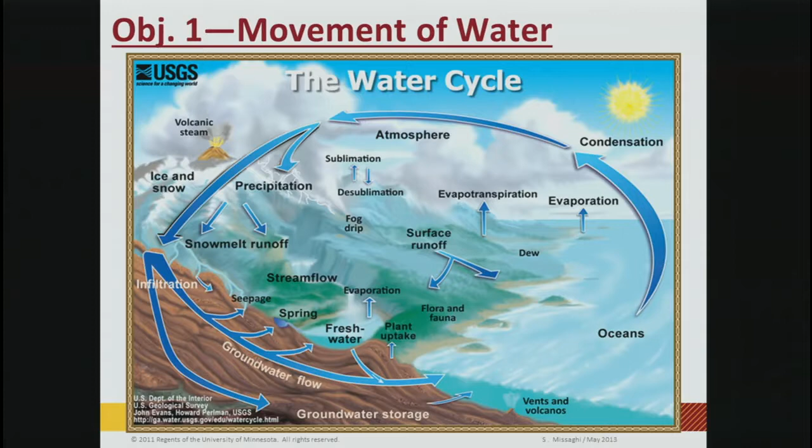Water cycle, right. I was even going to help, but I remember this doesn't show there. But it says it's a water cycle, right? It's a good reminder again. It's a constant move, constantly moving, going from the ocean up to the sky, down, and so forth.

But it's not as simple as it is. It's got many parts, many different things happening. Unfortunately, fortunately, we're just going to be focusing on this little bit tonight. We're just going to be talking about surface runoff. We're interested to see what happens when the rains come, hit the ground, and how does it move downstream. That's what we're interested in.

And then objective 2 was how water moves. We're interested in how water moves on the surface, but in reality, water is everywhere. We have groundwater, we have surface water, and in groundwater, water moves somewhat similar to the surface water, but we have aquifers and so forth.

Did you all cover this all up? You know all these things we talked about last time? Good, I don't see anybody shaking their heads.

No, okay, and then the idea that water shapes the land. And that is true. Not only shapes it physically, it charts the streams and the lakes and everything, but also, depending on where the water is, most of the cities are built around the water. So it also has an impact on the social.

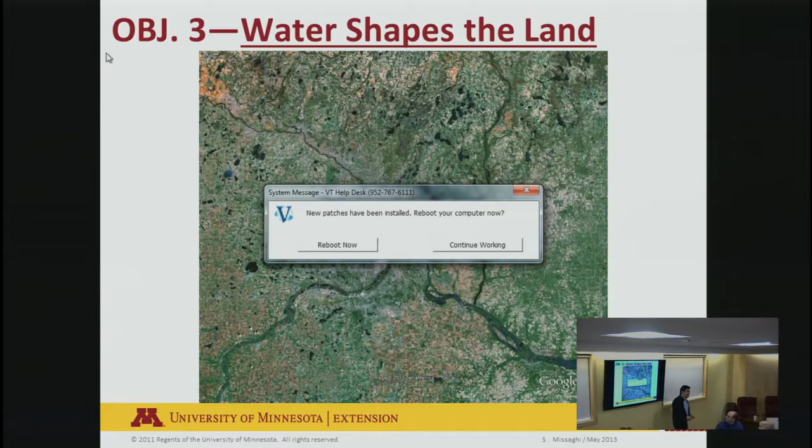Okay, that's okay. I'm sure this is a fantastic facility, so everything is new. So good, now I can blame everything that goes wrong on the computer. Oh, and you should, okay.

So we go. That's okay, we'll do it this way. Sorry, folks, maybe we need to get out. Was it 2 of them? Not sure, no, try. For all of you who were excited that this thing was going to end early, it is not. We're going to go on, we're going to do this.

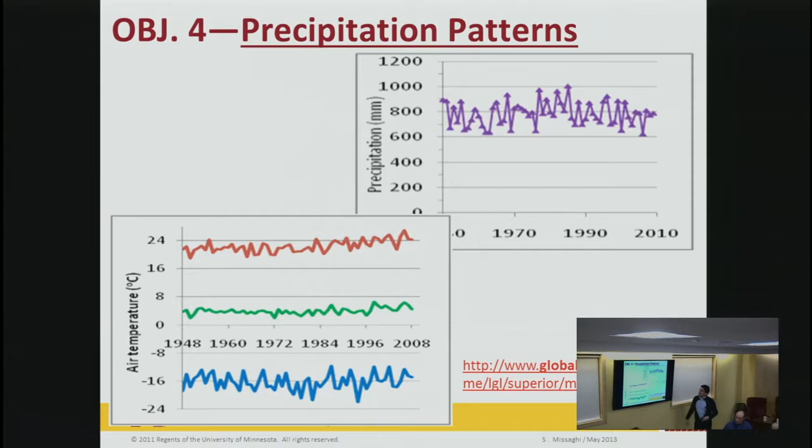And then we talked about the precipitation rain patterns. Just very quickly, I tried to do some research on the site, and one of the parts we're interested in is how the pattern of the rain impacts the pattern of the stream flow. It sounds so simple—when it rains, it's got to go somewhere, it goes into the stream—but it's really fascinating how the pattern of the rain influences the pattern of the stream flow and how that impacts the water quality in the lakes. So everything connects with each other. And of course, we've got to remember precipitation patterns not only change through time, but they change for locations.

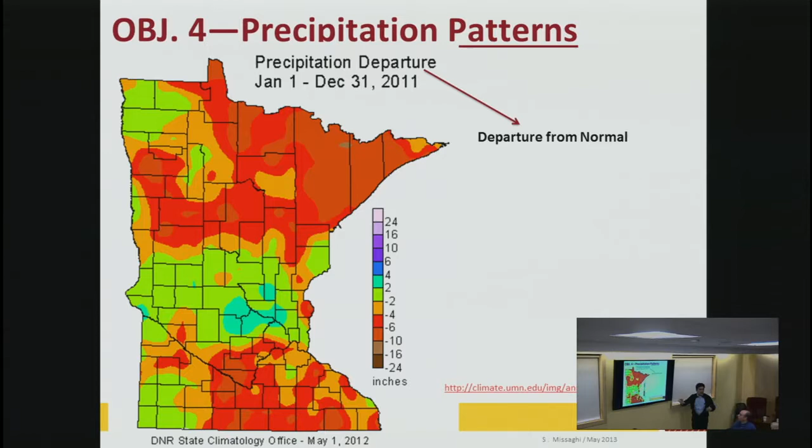Minnesota does not have a uniform pattern of rain. If it rains an inch here, that doesn't mean it's raining an inch in northern Minnesota. It would be totally different. This map shows the annual average departure from normal. If you look at the past 30 years and took an average, say it rains about an inch a month in July, this shows how different that particular site was from normal for that year. Across Minnesota, it's always shifting, always moving. Things are always changing.

So this was our very quick hydrology reminder, not even a full review, just a quick reminder of the 4 objectives we'll use tonight. The takeaway is to remember that water has energy, and that energy creates action. The water moves, it moves things, it cuts through things. We want to remember those things.

All right, so now we can jump into stormwater and talk about what it does for us. We're going to have 4 chapters tonight. Chapter 1, as I said in the agenda, we'll talk about the big picture — what's in the big picture, what are the big issues. Then we'll talk about the problems — by problem I mean, what does stormwater have to do with anything?

What does stormwater have to do with water quality or watershed management? How does it all connect together? We'll talk about that. Then, of course, our favorite part — talking about solutions, the exciting stuff. And then we'll talk about how to make a plan. What did we say? There's no silver bullet, no magical BMP. We've got to use a number of different BMPs to solve our problems.

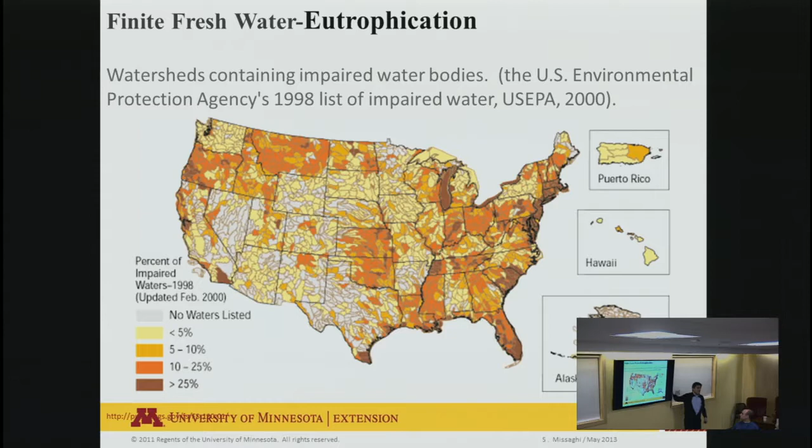They could also - I was saying the other thing is that if we have investigated them and if we know, I mean there could be a lake out there or a watershed out there we haven't tested, and therefore we're not aware of it. It's a good point.

Okay, so the message is that we have that finite picture. Remember that globe with the little drop? We have that little bit of a drop of water that is facing demand, it's facing eutrophication, and we also have this changing climate.

How many here still do or used to listen to Mark Seeley, state climatologist? I think we're so lucky in Minnesota, it's just fun to listen to him. I really encourage you to go to his website - just type Mark Seeley, state climatologist, it will take you to his climatology group website. He's got tons of information that he's freely sharing with everybody, and we use it all the time. He's got an excellent way of explaining how things are happening, how things are changing.

We just look at the data and we'll see certain trends, and bottom line is that it's a changing climate. Things are changing. To plan for the next 30 years is not simply looking back and saying, let me see what happened in the last 30 years and I'll plan for the next 30 years - it doesn't work that way. We need to be conscious that things are changing at different rates, so we've got to plan accordingly. So the water is also being impacted by that.

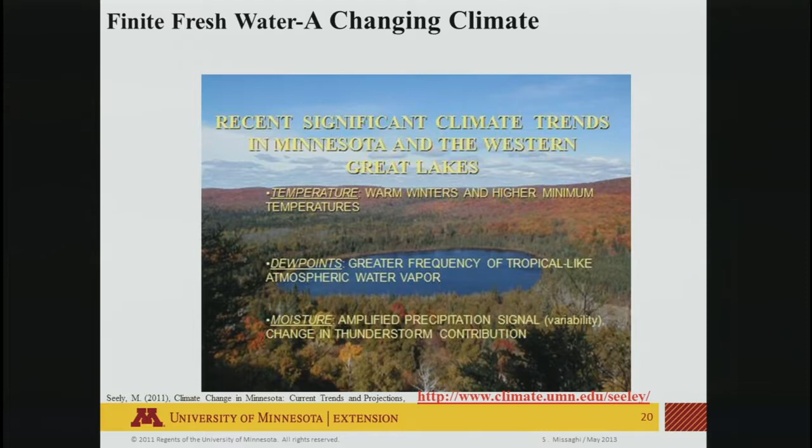We know our rain precipitation - what's happening with the rain pattern is that maybe the amount of rain is not going to change from year to year, but how much you get, like 6 inches or 9 inches per 24 hours or 1 hour or something. What we know is that in the future that's what is going to happen - we're going to have an amplification of the rain events, all maybe happening at once, and we'll have a long drought period in between the rain events. So those are things we want to be conscious of.

So those are the 3 issues that our finite freshwater is facing. We have an issue, it seems, and we have some urgency. And then you ask the question, well, why do we care? Well, we care because if we don't protect and manage this finite amount of water, we're going to be in trouble. And we care about it because we care about water quality. We like to fish, and we like to eat fish, or lots of other things that oceans and water offer us. So that's our motivation. Our motivation to care for stormwater, to care for water quality, is because if we don't manage it, if we don't protect it, we will not have it.

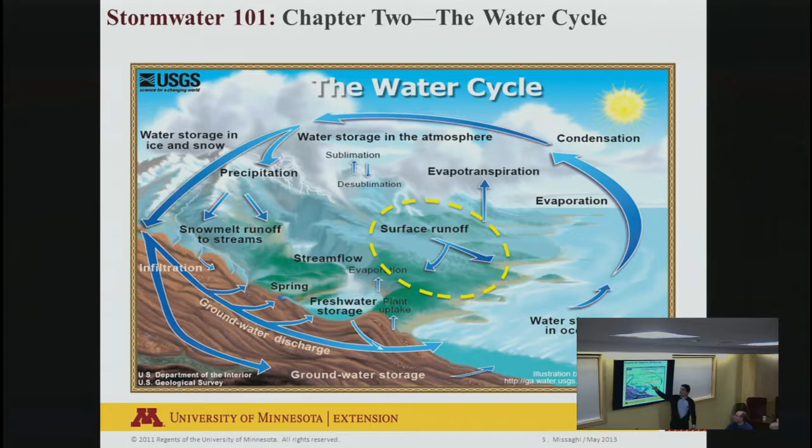We're just going to go look at how the water moves downhill, that's what we're going to talk about for the next half an hour. We know water moves downhill through streams, creeks, and rivers, and so forth, so then all of a sudden it becomes really important. A measure for stormwater, one of the main measures is, well, how much stream flow you have.

You always hear people talk about stream flow. You put it in cubic feet, you put it in gallons, all these different units and everything, acre feet and so forth. There's an interest in how much water is constantly flowing.

So one of the things we're going to learn, first of all, is that the rain impacts the streams. And we want to know, so we measure the streams to have a handle on how much water is flowing.

You can go out right on the web and see right now how that stream is flowing. It's exciting. You can look at that and find out the flow in the water in the stream. That's important for us because the rain impacts the stream.

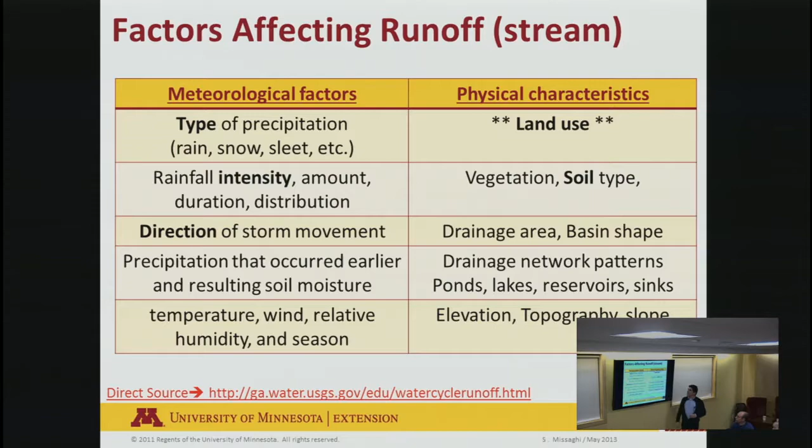So what we have on the land is going to impact that runoff also. Let's make it very simple. Let's take a look at two scenarios. We're going to look at a typical annual water budget of an area that's what we'd call normal, something we haven't impacted much. We haven't built any high school there, we haven't done any mall, we don't have any clinic. It's just a very nice forest city out there.

So as we get the rain, about a third of it infiltrates its way into the ground and turns into groundwater. Then we have about a third of it, or 37%, of course the numbers are all suggestions, right, things always change. But typically we get about a third that goes up as evaporation or transpiration through plants or simply evaporates into the sky. What's important is that only about 1% or so, or less than 1%, is generated as what we call runoff or stormwater. That means lots of it goes into the air, lots of it goes into the ground. Some of it goes as interflow, right beneath the surface of the earth, and that's what actually feeds most of the creeks and streams. Just a very small amount is generated on the surface because the rest is being absorbed or evaporated.

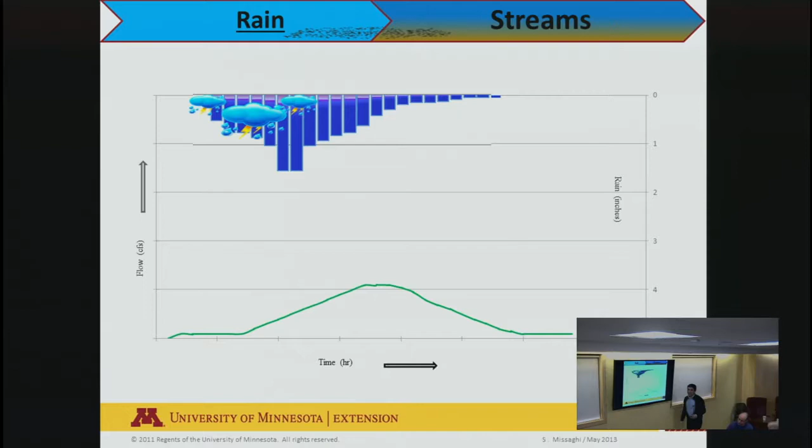So here we are in our normal conditions. It rains and the water gently goes up because we only have about 1% of water produced as surface water runoff or stream flow, and that's what we're going to get.

But here, what did we do for our water runoff? We increased it, a huge deal, so that water has to go somewhere. And if I'm standing in this stream, what do I experience? I get knocked over, exactly, because water has energy, and that's important to remember.

So how much water — number one, I'm going to have more water. But is that more water distributed equally through the time? No, I'm going to get a gush of water because there's no place for it to run, there's no refuge, it's going to hit the surface and come down. So all of a sudden, not only do I get more water, I get it coming at me all at once. Those are the main differences between those two issues.

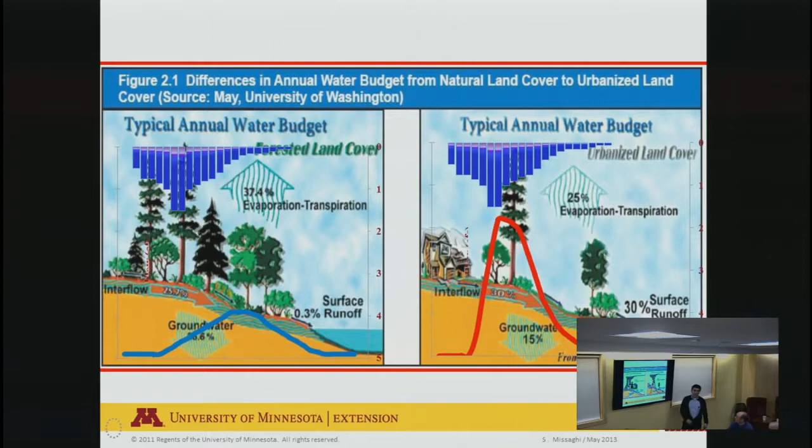Good? And this is the area — a highly technical term I use — I say 'glob of water' here. This is the glob of water that we have to deal with. So when we talk about stormwater management, that is what we're talking about: how do we deal with this excess amount of stormwater, this glob of water, because it wasn't there before, now we have to deal with it. How do we deal with it?

Yes, ma'am. I'm just trying to understand, from a mathematical concept, why there isn't more area under the curve differential. This red curve is only about... the water area under the curve, and yet it's 30% more of an increase. I'm just being very observant. Very good — conceptually it's not working for me, I'm trying to figure out why. You're absolutely correct, I did not do the math — I did this for a graph.

You're absolutely correct. So if I went out there and measured the area under my graph, and if I increased my surface runoff by 10 times, would I have increased this area by 10 times? Probably not. Good point, I've got to make a note of that. Good catch, however it is true. It's a good point, because the ratio — as we said — the more rain we get, the more stream flow we're going to have.

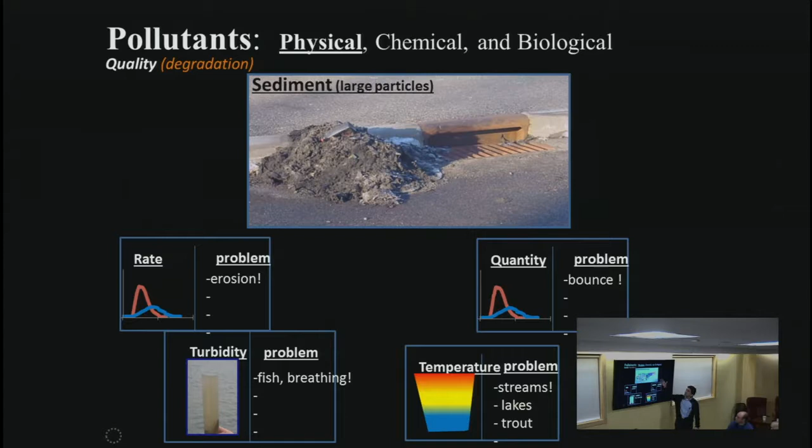It's a nuisance for fish. Imagine if I were a fish trying to breathe the water, and you've got all this junk in it—imagine having so much dust in this room that it plugs our lungs. It's the same thing; it causes the same difficulty and stresses the fish living in the water. So having sediment is an example of a physical pollutant.

The sediment is not only a physical pollutant, it can also impact the water chemically, because sediment carries a lot of other things with it. It acts like a train or a truck—not only does it move, but it carries lots of other things with it. A lot of nutrients get attached to the particles, to the sediments, and as the sediment goes down, so do nutrients like nitrogen and phosphorus. You all know about nitrogen and phosphorus, right? What's an example of phosphorus?

Fertilizer, right? We don't want excessive fertilizer, because as someone mentioned, it pollutes the water. In the sediment, we have automobile residue from the roads. Every time we stop, we wear out a little bit of that brake disc, and it's got to go somewhere. So we have petroleum, copper, and everything else - all the chemical components that can attach to the sediment and go downstream. So we can have physical pollutants that change the water temperature or just the act of having sediment in the water, and we can have chemical pollutants, which is all the stuff that gets attached to the sediment.

How about biological pollutants? Sometimes the things that we love and adore are the ones who cause the problem. Pet waste is a big issue. There are many neighborhoods and watersheds where the waters are getting contaminated by pet waste. How many of you have experienced going to a lake where the beaches are closed due to bacteria? Like Lake Hiawatha - they look beautiful when they're flying, but those Canadian geese, when they're in the water, they're a nuisance. Even though they look nice, they sometimes bring too much bacteria into the swimming beaches, and we have to close it down. That's an example of a biological pollutant.

This is just here because I know the slides say the date from last year, but they're really updated, so I put a lot of the information here. We won't talk about it in detail, but later if you go to the slide, this is just looking at the size of everything - giving you a relative sense of the size of where they are. So these are the three examples of pollutants: we have physical, chemical, and biological pollutants.

Yes? The standard water filter, like if you go camping, what does it filter down to that's smaller than that? Good point - actually this is sort of a line in most labs. When they talk about dissolved, anything smaller than 0.45 micrometers is considered dissolved, so the filter separates things - anything up here is dissolved in the water. So that's what you separate: this would be the solids, and everything else here would be dissolved.

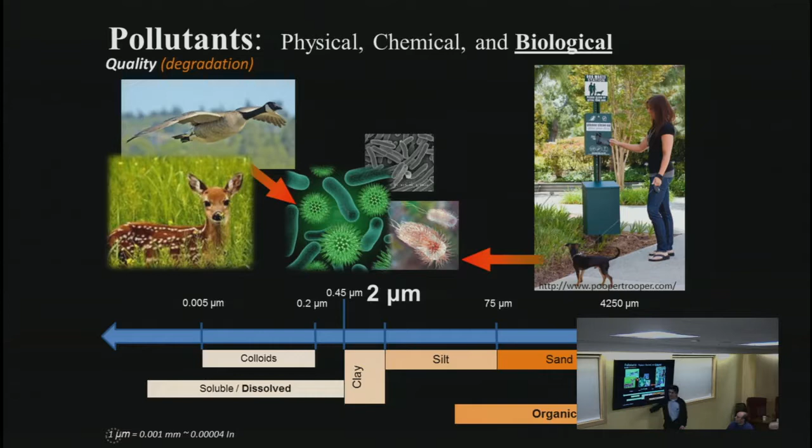They went back and looked at these numbers and said, what did we do wrong that all of a sudden we have all these issues? Flash flooding, issues with the beaches, issues with chemicals in the water. And they said, well, maybe it's because we have changed the landscape to a great extent - we have changed the hydrograph, and now these are the consequences. So what green infrastructure is talking about is, well, maybe the way to solve the problem is to restore natural hydrology. That became the concept, or the driver, for this whole idea of solving the problem. Why don't we just mimic the natural hydrology? Why don't we just restore the natural hydrology and see if we can solve the problem? And actually in Minnesota, not many years ago, we decided the same thing.

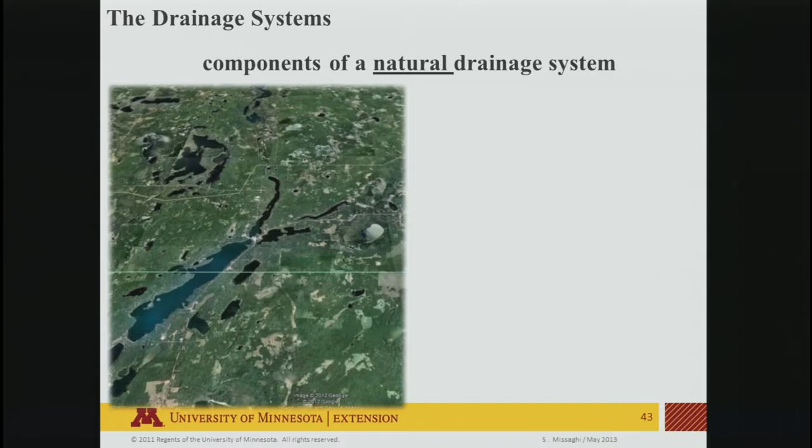Okay, it's just going to come all at once this time. I know you guys know everything, so it's going to go quickly.

Okay, so when we look at this natural system, what we have is a landscape. First of all, we have soil, we have the ground, we have the trees—that's our landscape, we have our vegetation. We have this background, this natural landscape that includes forests, that includes permeable soils—soils that allow infiltration of water into the ground. That's the natural background of this landscape.

Then we look closely and we have low spots—places where water wants to go downstream. Water can find its way into these gentle streams, and it can find its way to wetlands, swales, pools, ponds, or floodplains. So water has a place to go—we have these low spots or puddles.

And then we look at all these puddles, all these wetlands, maybe connected to each other by creeks, by streams. So we have what we call a conduit system—something that connects one low spot to another and moves the water. The water gets temporary storage here, fills up the pool or puddles, and when it gets to a certain level, it goes into the stream, and from the stream ultimately finds its way into a lake, a sea, or an ocean.

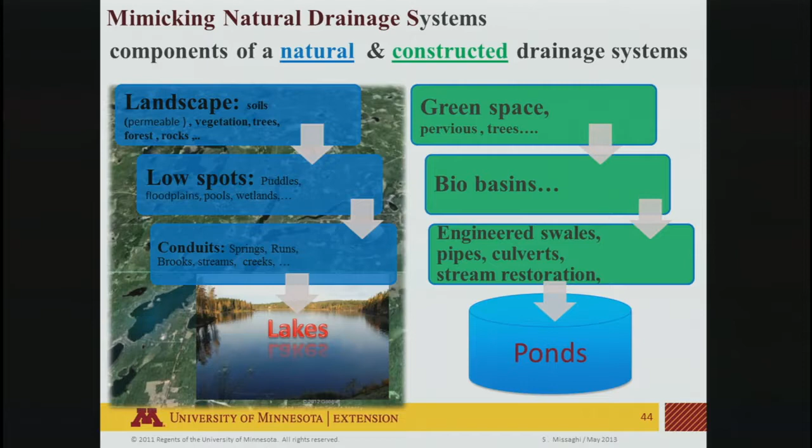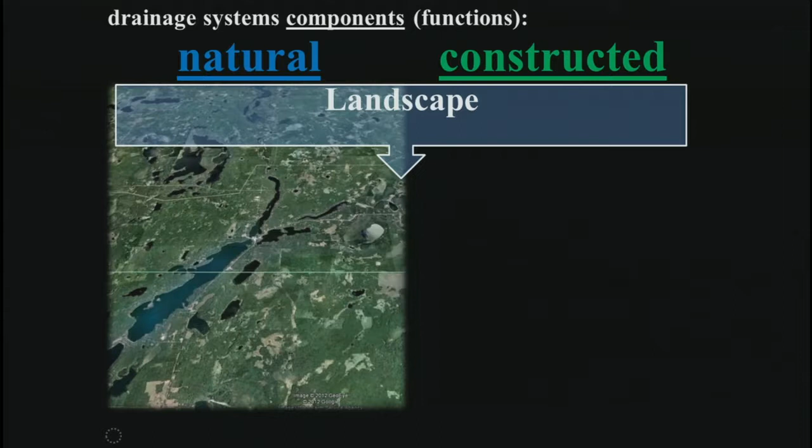Okay, so again, another review, just trying to get the point across. This is natural hydrology, so we have a landscape. Let's make this quick: give me an example of some of the parts or components of a natural landscape. What would you find here? Hills, yes, exactly. And what would you find in the constructed one?

Right, you do plantings, the green space, and pervious trees and so forth. How about low spots? With rain gardens, we make up for the lack of wetlands, where we bring some of the functions back, because we cannot have what we've already lost. Conduits, it's the same idea. We want to bring back the functions that we don't have in that landscape, and that's how we can get to that lower hydrograph.

A puddle, that's a very good question. Let me answer it. A puddle would be any low spot on the surface that can hold some amount of water, and it has a huge impact on how the water flows.

I used to work for a city, and our city engineer used to tell us that when they resurface the streets, they remove the top two or three inches and put new asphalt, and they used to measure the water downstream. The older streets have lots of puddles, so after a quarter inch of rain, you got very little water a quarter mile downstream. After they repaved the road and made it absolutely clean and smooth, they got a lot more water downstream because there were no little puddles.

So those puddles are really important in the hydrology. Nature is never smooth or straight. It always has lots of edges, puddles, and irregularities.

And you didn't mention the natural habitat value, when you're reconstructing things, trying to regenerate the habitat services. Absolutely, I'm sorry, it brings back those functions, yes.

But it's hard to get enough. I'd like to have peepers in my neighborhood, but I don't know if you could actually construct a rain garden that little peeper frogs would live in, because we have to go up to Worth Park to listen to the peepers. It's a good question for me: little kids in the city can't hear little frogs, so what would it take to actually build a wetland in the city that kids could hear frogs?

Good point. The other point you're missing on the ponds and puddles is the insect level. If you don't have stable water for bees and a lot of the insects we're trying to get for those frogs - if you don't have a stable water system that's not moving so much that it's flushing it out - because bees aren't like ducks, they don't just land on the water and fly away, they crawl up to it. They actually like muddy water, so you have an insect problem if you don't have that level.

That's right, and that's a very good point. So every time you bring some of this function back, hopefully you're bringing some of that ecological function as well.

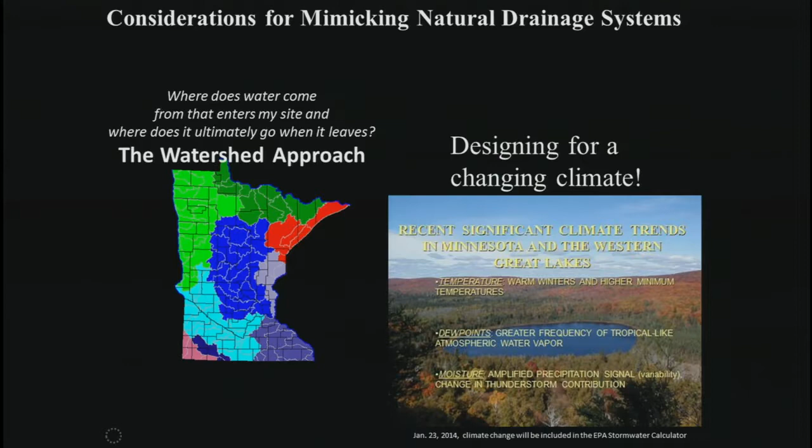We need to design it with that change in mind. Those are the two conditions in mimicking nature, before we can restore our hydrology. So before we jump into the solution, we want to talk about two things. One is the big picture - remember the slides about water. It's a finite amount of water, and there are lots of issues we're dealing with. So what is the problem? Who cares? What does stormwater have to do with water quality?

Well, we talked about it - the excessive runoff creates three problems. What are those three main problems? All right, I couldn't hear it clearly, but hopefully you got those three. And how do we solve the problem? We try to mimic the natural hydrology. But before we can mimic natural hydrology, we have to consider two items. What are those two things? Watershed and climate. Absolutely, we're done.

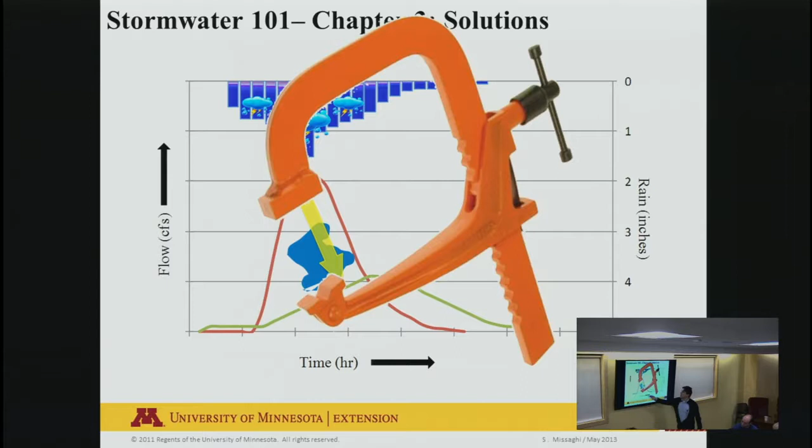And the tools we use, and they are really tools, is what we call best management practices, or BMPs. So anytime we talk about best management practices, what's the purpose of that BMP? To bring that hydrograph down to mimic the natural hydrology.

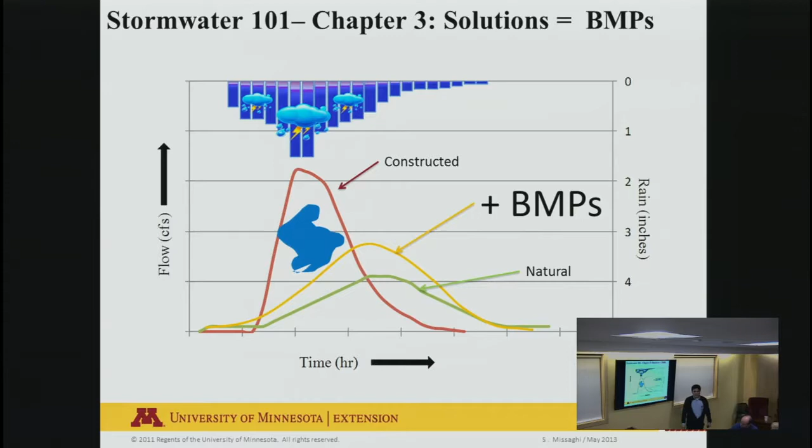So we have our natural hydrology, we have our constructed hydrology, we have this glob of water, this excessive amount of water. We got to do something with it. We can only take care of so much of it. So the best thing is to minimize it or treat it on site or whatever we need to do. And we use different tools to do it, and those tools are called BMPs, best management practices. All right.

Now, best management practices, they could be any practice. However, they are legally defined. If you go to Minnesota statute, you will see that it is legally defined as a proven engineered method. So a BMP, an engineer has to sign it, it has to be designed. That's very, very important, it has to be designed. We can't just apply something and say it will work. No, we have lots of tools out there. They're proven, they can work.

And you can divide the BMPs a number of different ways. How many of you folks are familiar with those funny curtains on the properties? Sometimes they're black, sometimes they're red. They call them silt fence. What is the purpose? Exactly. And their job, do we put them in place to last for eternity, even though nobody ever removes them? But in reality, they go in for a certain time, so they're what we call a temporary measure.

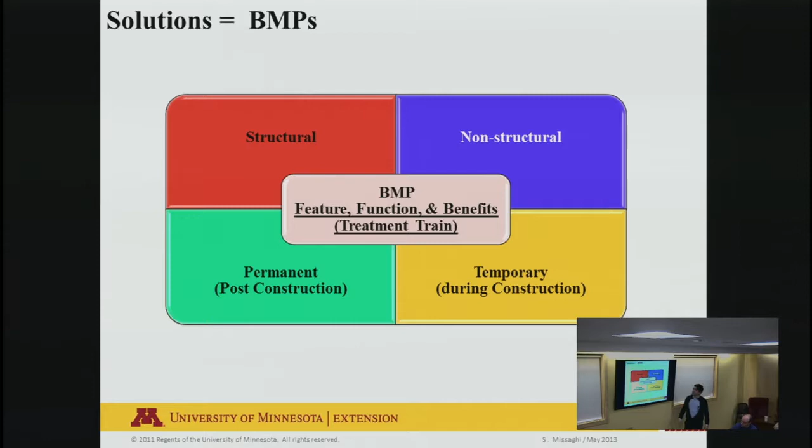There's some things like the water quality pond we set in the ground as storage. We want them there for a long time, so they call them permanent. So there are many different ways to categorize the BMPs, or these tools, as structural, non-structural, and so forth.

The ones that we're going to use tonight, and the ones that I'd like to use, is what we call this treatment train. And all the information comes from the Minnesota Stormwater Manual, which all you got to do is Google it and it comes. And again, we're so lucky in Minnesota, we have so much research, we have many different agencies that provide lots of information. This is all the information here, so the material is available as a PowerPoint, but also the original material is available in the Stormwater Manual. Yes?

This particular one, the Stormwater Manual, the website is at Minnesota Pollution Control Agency, MPCA. So if you search MPCA Stormwater Manual, it takes you right there.

And just mention the minimal impact design standards. The MPCA is trying to help cities use this a lot more everywhere else in their city. In order for cities to have less red tape, the MPCA is trying to make it easier for cities to implement all these BMPs through what they call the minimal impact design standards. So if they use these BMPs, they'll be able to get credit for all the things they have to show they're doing. It would have to do with new developments as well as redoing streets and everything.

And remember, we talked about that in Minnesota a few years back. We decided that we want to mimic the natural hydrology, and we want to adopt the low impact development approach. The MIDS is a way to help us implement that approach.

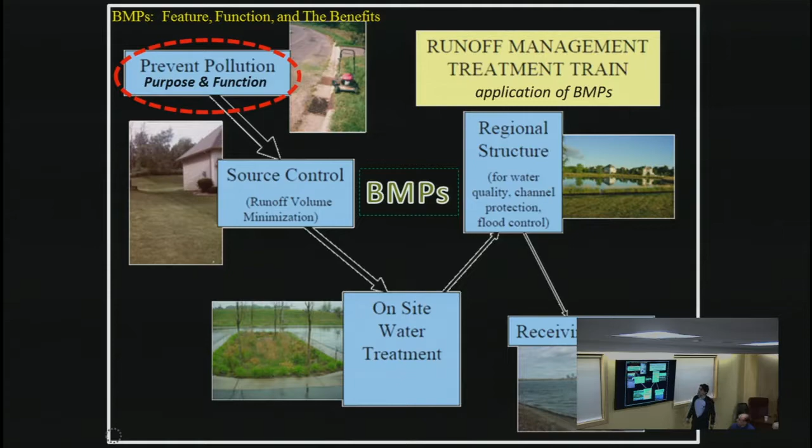We're not going to talk about all of this. I know this is breaking all the PowerPoint rules, I put in so many texts, but I put it here because if you go back as a reference, all the information is there. It's a testimony that there are hundreds of different ways of preventing pollution from going downstream. Some people call it P2, pollution prevention, no matter what name you use, there are many ways. There are tons of different things we can do for residential, and tonight we're going to focus mainly on this part. But there are hundreds of different things municipalities can do, and that's what we do in our day-long classes, we deal with municipalities on how they can improve the environment and handle stormwater.

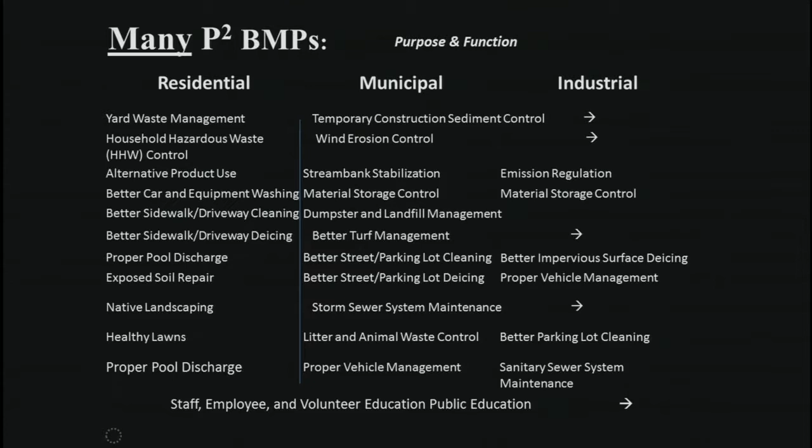Industries have hundreds of different methods of how they can deal with their stormwater, just by preventing it from going downstream to begin with. And there are different methods of applying those approaches.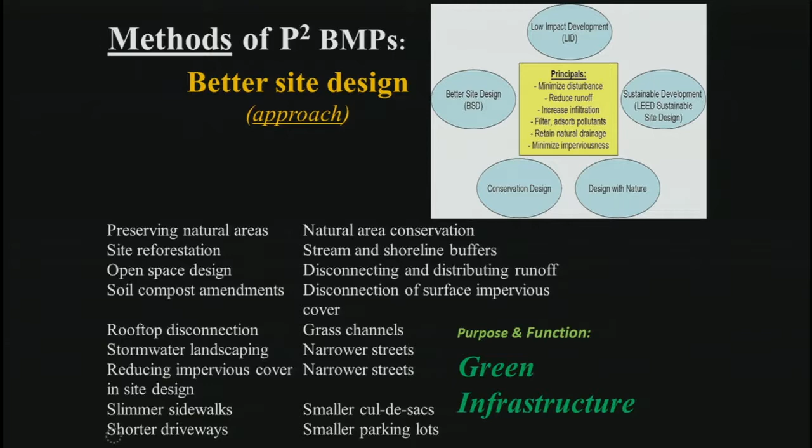I put it down here so later on you can have access to this information. Some people call it low impact development. We already talked about green infrastructure. Some people may call it conservation design, design with nature, design green. What's the point of all these things? We're all moving in the same direction. We all want to mimic natural hydrology. Maybe different names, a slightly different focus, but they're all trying the same thing. I've just listed them here to show the possible different approaches.

So we said the first set of BMPs we're going to talk about is pollution prevention. So let's see how we're going to mimic natural drainage systems, natural hydrology, through pollution prevention. Doesn't that sound interesting to you?

These are some of the things we can do as homeowners. The first thing is public education. It is number one. Many years ago, we used to write the plan, do everything, and the last sentence says 'and we will do public education.' That was the extent of it.

Everyone has learned that public education is a real tool. We can make things happen by educating our public, increasing general awareness, letting people know what they do on their yard has a direct impact on the lake they enjoy on the weekend, or the stream, or the path they walk their dog on. I couldn't think of another pet, maybe a rabbit, I suppose. But public education does work.

Something I've tried to do is actually put a measure on it, sharing with our partner cities. We've shown that by increasing stormwater education and the maintenance of your best management practices, you're preventing up to 1,000 or 2,000 pounds of phosphorus from going downstream. Every pound of phosphorus removed minimizes the cost, so we can put an actual dollar figure on the value of education. It might be pushing it a little, but the idea is it has a direct impact, and we can measure that.

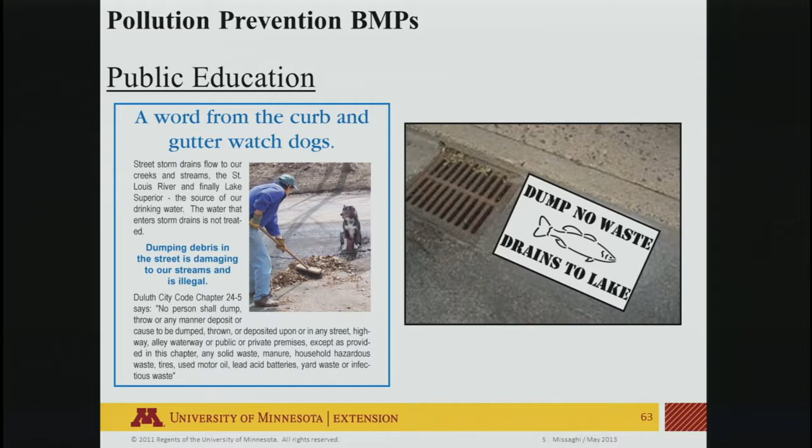Exactly, it goes to a creek. Maybe it goes to a water quality pond, or maybe it goes into a BMP hopefully, but it ultimately falls into a lake or a stream. So whatever we can remove from the system is helping to prevent pollution. How many of you have seen these markers on catch basins? Many cities are doing that, reminding folks don't dump oil here—it goes into a lake, not to a purification system or anything like that.

Public involvement—we're just talking about it. You cannot get anything done without advocates. That's rule number one you learn as an environmental manager. It takes people to do the work. You've got to have advocates, you've got to get out there. Look at yourself—you are part of the group that's going to make the movement. You are here because you care, and it's your participation that makes the difference, going back and connecting with another 5 or 10 people, and that makes a real difference.

So public education is important. It's pollution prevention—you help people not pollute to begin with.

Cleaning the streets—anybody from a city here that provides a free bucket and broom to take the leaves out of the gutter? By removing it, you're keeping it from going into the storm sewer system, and also in springtime during freezing conditions it doesn't plug the catch basin, so it doesn't create flooding. Many cities offer that, or have machines clean the streets. So those are some things you can do by capturing the pollutant on the streets before it goes into the storm sewer system. That's pollution prevention—real measures we can take to minimize pollution.

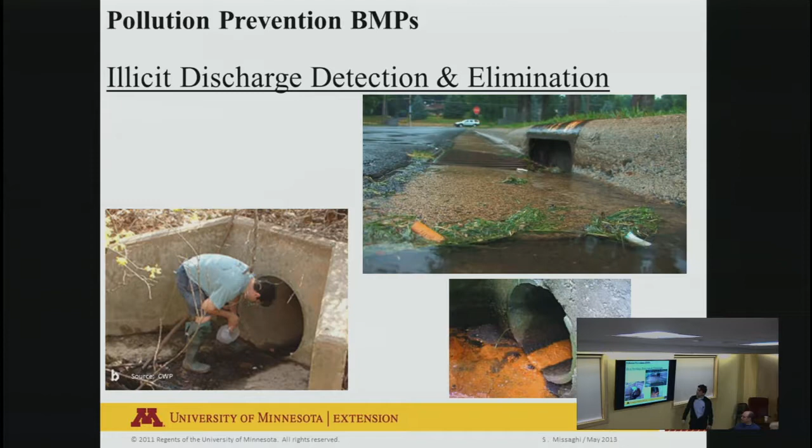It sounds like those are some good housekeeping measures that we can employ. We can do this, again, as a homeowner maybe not, but as a business, and we can do some of the things at home. What are we storing on the property?

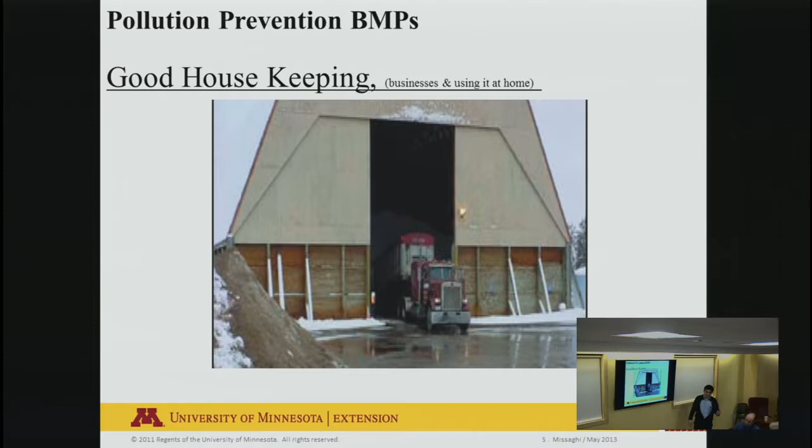So, what is BSD? Oh, there's no way you would have remembered it. It was one of the terms among the hundreds that I showed you on one of the slides. It's an approach: better site design.

The idea is, just a quick reminder, we may call this a number of different things, but what is the primary driver for all of them? There are BMPs to help us do what? Mimic natural hydrology. Boom. And is it going to improve water quantity? Is it going to improve the rate control? Is it going to improve the water quality? If it does one of those three, all right, we're all for it. If it doesn't, it may be very good stuff, but it doesn't help stormwater. Because tonight we're just stormwater, right?

Everything connects together. So, better site design - one thing as a homeowner, this is beyond what we can do ourselves. If the city comes with an idea, saying we're thinking of eliminating your sidewalk, or expanding it, or doing other things - maybe putting rain gutters on the sides, making the road jagged instead of straight, making it a multifunctional landscape area, introducing a stormwater system into your street - as a homeowner, the least I can do is be open to the idea. If you've educated your neighborhood about this, it can get implemented, and you can improve the environment.

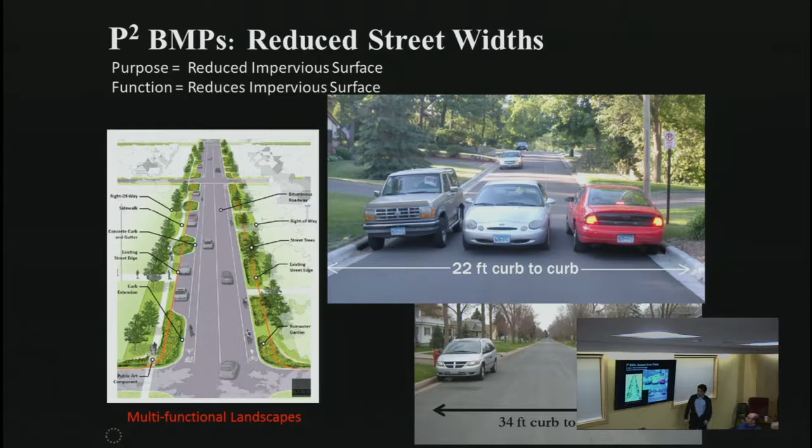Someone already mentioned this - connected surface area. One of the things we learned is that when we engineer a structure, we want water to go from point A to point B as quickly as possible. But when we look at natural drainage systems, we see lots of puddles and low spots - that's not how it works in nature. We like interruption. We don't want water from the roof going directly into the outlet down here. We want the water from the roof to come down, go over the grass, sit on the grass for a little bit, and find its way downstream through a gentle slope before it reaches the outlet.

So rather than having a gutter straight to the storm catch basin, we want some interruption in between, so water can hit the ground and infiltrate, or at least slow down. Maybe we have a street without a curb - maybe our city would be open to that idea if it works. Nothing works everywhere, but maybe we can have a street without a curb. When the water comes, if we've designed it properly, it slows down and goes into a ditch designed with check dams. It takes a long time for the water to get downstream, giving it time to infiltrate into the ground or evaporate, reducing the water.

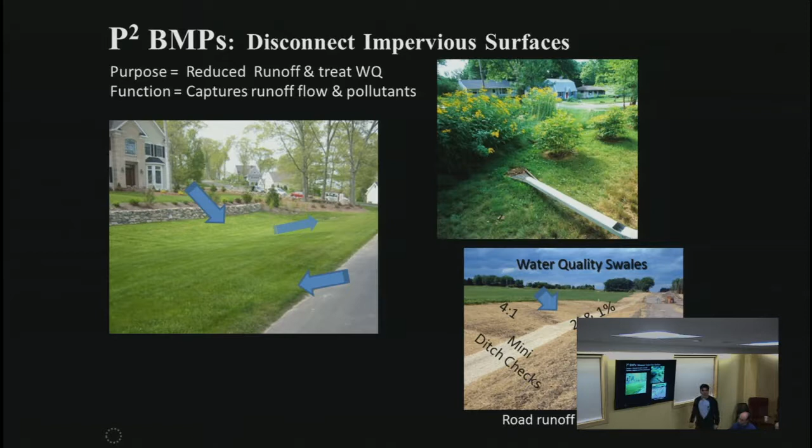What about stormwater use? We have all this water during the summer. We spend money to get rid of the stormwater, and then we turn on the tap and spend money to water our grass.

Somehow this equation just doesn't seem right. It's a very simple process. Why don't we harvest our stormwater during the summer, instead of spending money on water from the aquifers we're concerned with, and use the stormwater for our outdoor use? Because if you look at total use of fresh water, about 15% is for households, and more than half of that is for outdoor use. So we can be very effective by simply harvesting rain and reusing the stormwater.

Okay, that was a very quick overview of pollution prevention BMPs. So what do we do here? We try to minimize the rainwater runoff as much as we could. We did everything we could, but we still have some runoff on our site. Now, the next step is to do what?

Source control. Is there a way that I can hold that water where it falls? If the rain hits my ground, one of the easiest things, if it's feasible, can I encourage it to infiltrate into the ground? That way, not only do I minimize it from going downstream and do pollution prevention, but I'm also reducing the volume, minimizing what goes down.

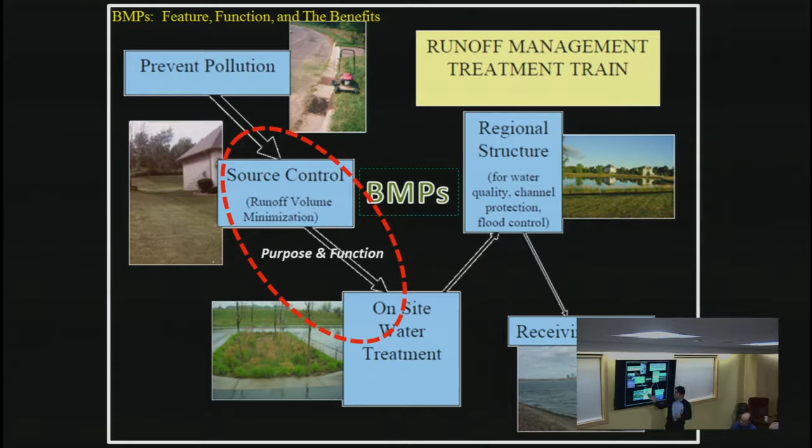So now we're going to focus on source control. And I got my disclaimer here: not everything falls in every step. Some of them may go a little bit here, a little bit there. So you're okay with that, right?

All right, if my goal is to infiltrate the water into the ground, what's my number one ingredient? That's what I got to work with. We've got to remember, if I'm going to use soil, I better have the right soils in the ground. If I don't have the right soils, nothing works. You may find it interesting, but it's a reality.

You work with a lot of people who design lots of things, and you have troubles. They come to you and say, this is not working, this is not working. We ask the question, have you tested the soils? It should be the first thing. Our main ingredient is the soils. We've got to have the right soils, generally.

Generally, a good soil is about 50% solids, a quarter of it air, and a quarter of it water. That mixture makes it feel like a sponge. That's the sort of soil we want—a soil that has lots of porous area where water can find its way into the ground. So we deal with the sponge, right? And that's where we can have aquifers, because the sponge can hold the water, and we can tap into it, suck up that water, and use it for whatever else we need.

But what happens if you have a sponge and you press on it? You compact it, and it's going to turn into a brick. If you press the sponge, can it absorb water? That is exactly what we do when we compact the soil. They've done tons of research, and we've known this for decades.

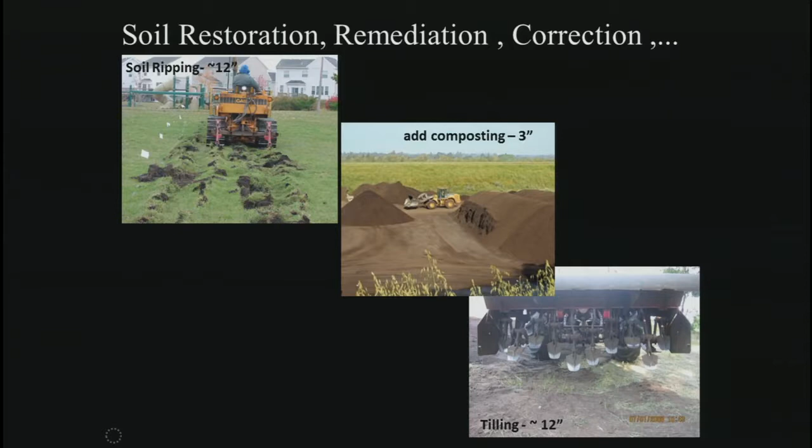You're correct. Again, what we're trying to do for our specific task is promote infiltration. One of the ways to promote infiltration is to correct the soils or restore the soil's function - if it's compacted, do tillage to basically fluff it up. But you are right, there's a balance, because composting does magic, but you've got to be conscious of where your water goes downstream. If it's going somewhere sensitive, you probably don't want to add nutrients. So you've got to ask: where does my water go after it leaves my site?

So here are the pervious pavers. Basically, how do I construct pavers with the underlayment so that when I pour water, it can infiltrate and go into the ground, but it can also hold the weight of a car. What am I looking at here?

Pervious pavers. Does it look perfect? No. What do you see then? Things are growing, they've got stuff all over it, right? And what do you think is happening here? Maintenance, exactly. I never paid this gentleman - that was a perfect giveaway.

Because you've got to remember, we're doing all these things - the system is carrying lots of debris with it and everything, acting as a filter. They're capturing everything else while the water infiltrates into the ground. So if they're doing their job, we're going to capture stuff on top of them. So we have to clean these things, we have to maintain them - and this is what's going on here.

They're washing the system. It's really important to remember, maintenance is not the end of the project, it's not the beginning of the project. It's got to be through the whole project. Even as a homeowner, if you're doing a rain garden or anything, you got to remind yourself, if it does its job, you're going to end up with something. It's just like having a filter in your furnace, and the filter is absolutely clean after two years of use. Well, something is not working, because if it was working, it should have captured something. It's the same idea. So the maintenance is to restore the design function. Maintenance always has to be part of it.

We don't have time to jump into maintenance, but just... Yes, ma'am? Is that supposed to say restoring or resorting? Oh my gosh, terrible, I'm sorry. Restoring, I'm sorry, to restore. Good catch. I wish I could tell you I would be spelling free, but okay.

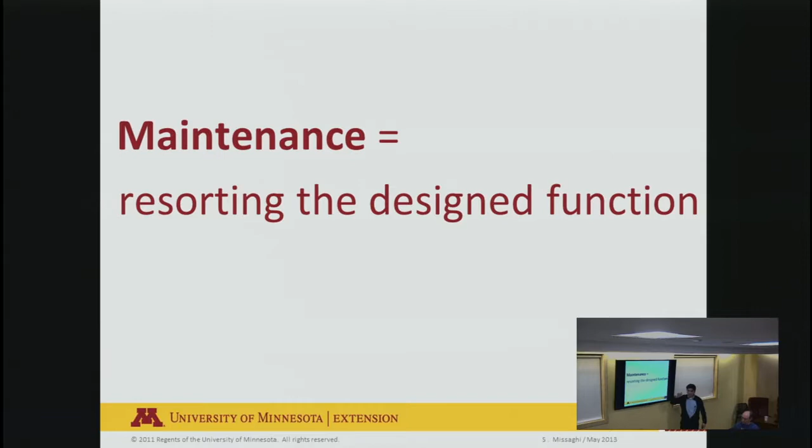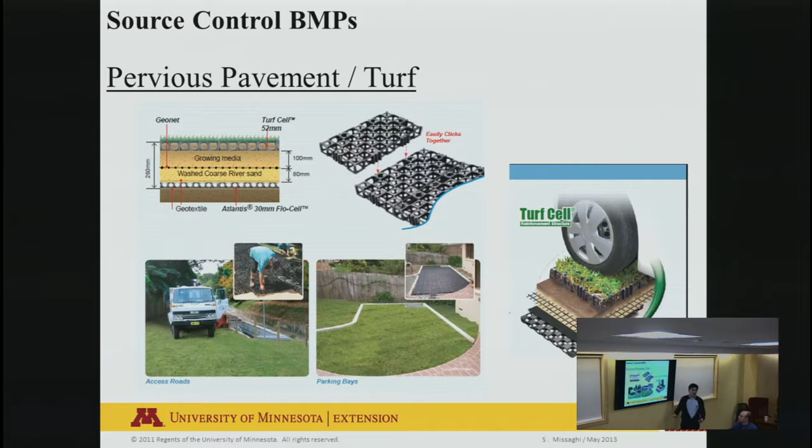Okay, so let's go back to that car that was parked on the grass. We have a lot of what we call this artificial turf, basically a plastic that gives the soil that fluffy, keeps it as a sponge, but also gives it strength so we can have a light truck or a car park on the grass. So we can have our grass withstand that compaction so it doesn't kill the grass. I know these things are becoming more available, and it's not as expensive anymore. I use this example, I've never been to the site, I hope it's okay with the folks that I borrowed the material from.

I just thought it was the greatest example. They had this beautiful park from the story that I read, and I really identified with the problem they had. The ordinance changed, and they said you got to have parking here, you can't just have an open area, you got to have a space for parking. So the dilemma was, okay, I have these beautiful trees, I have green, I need parking. What do I do? Do I go out there and cut the trees and put asphalt so people can park?

So their thought was, why don't we take this area that was already gravel? They put some of this mesh, or Turf Cell, into the ground, backfilled it with gravel, and kept it. So what this allows is the idea of pervious pavement. They're keeping the area open to infiltration, so water can still infiltrate into the ground. They did not have to capture the runoff, because if they had made it into asphalt, they would have had to capture the runoff and deal with it, meaning they'd have had to cut down trees to treat this runoff. This way, they don't have to have runoff at all, everything infiltrates into the ground. They had the opportunity, so it worked for them perfectly. They solved the problem, they still have everything, they got their parking. So it's a good example.

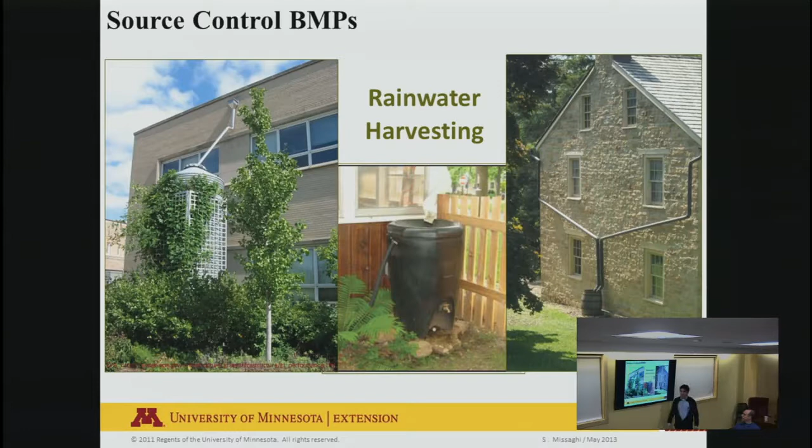And this can happen at the home scale as well. Again, rainwater harvesting, we talked about it as pollution prevention, but it's also controlling it. If I've done everything and I still got runoff, why not hold it if you have the opportunity? Many parts of the world use this as just a normal function. I used to live in Worthington, Minnesota, and we had an old house, and the first time I got introduced to the idea was when I went in the basement and someone had to explain what a cistern was. So many homes used to have a cistern holding the water for later use. And that's also source control.

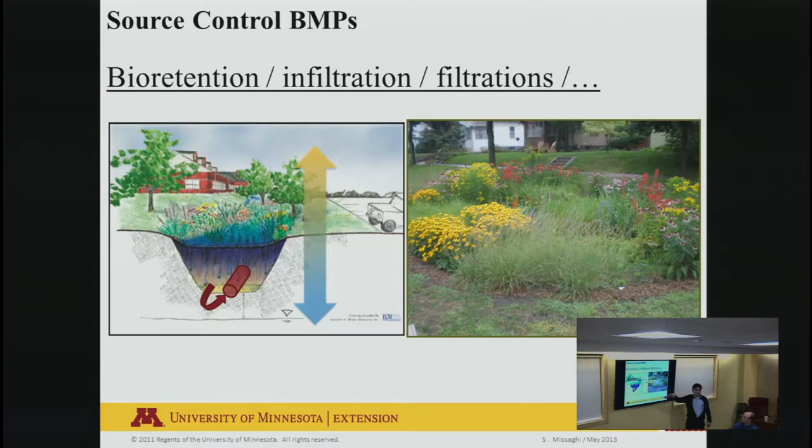Okay, let's talk about rain gardens for a little bit. They're wonderful, a good example of how we can create a BMP where we can promote infiltration into the ground, so we can lose water into the ground, but also we have plants. Remember our natural landscape versus the impacted landscape? What helped the water evaporate? The plants. We got all the plants fanning the water, so there's more water we can lose through the plants, right? So we lose water both through evaporation and through infiltration. That's why rain gardens are so effective. For tonight, we're going to lump them all together, bioretention, infiltration, and filtration. I know you have other nights you'll talk about them and distinguish the difference between all those as well.

Bioretentions are beautiful to look at. Why is this picture interesting? When I took it, it was gently raining, and it had already rained about half an inch. But look at the ground - there's no runoff. Everything is going into the ground. Not only the rain falling there, but all the water captured from the street is also infiltrating the ground. So they work.

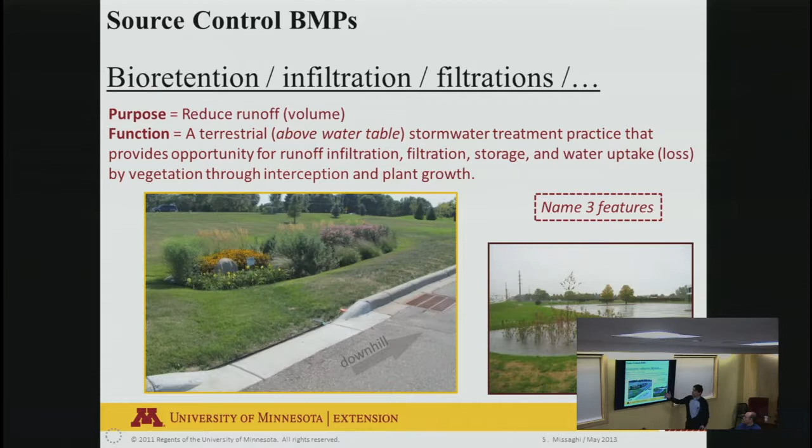Plants, yeah, bio retention. Those are some of the features of the rain garden. We can store water, and use plants to promote infiltration and evaporation of that water. And they come in every shape.

You can have them the size of your backyard. This is the Blue Thumb website. How many people here work with Blue Thumb? Google it tonight, it minimizes so much work. Years ago you had to go search for the plants yourself. Today you go on this website and say, I want it blue, I want it to bloom in such a week, and so forth, and boom, the list is right there.

No need for botany. One of the things you'll get as we get to the part where we're designing rain gardens is one of the Blue Thumb guides. It's a very good site. We're very lucky, and there are different ways of showing you how they work.

You can capture the water from, say, a large parking lot for a home. Basically the same principle will work for a home. You capture the water, trying to capture all the large sediment first as pre-treatment before it goes into the rain garden. These are basically pre-treatment areas.

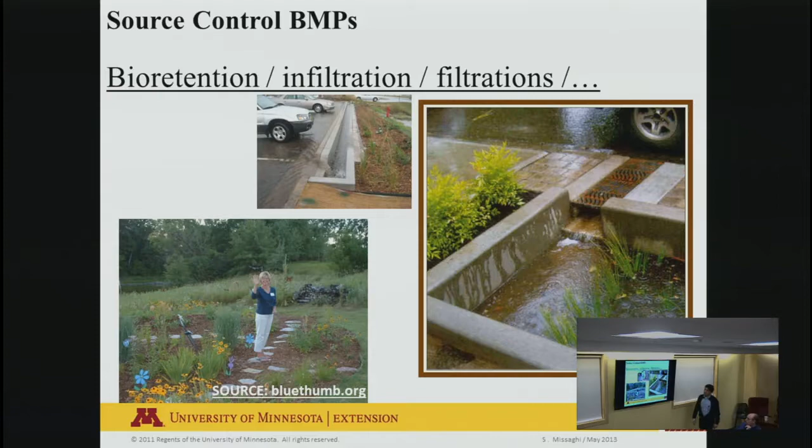That's a very good name. I actually have more pictures of it because there are a couple of tricks to how to do this, and some people have used it. I'll show you a couple of pictures later on.

Trees, again, it's funny how we're going basic, finding out trees are actually beneficial. I know it's a radical idea, but now we're thinking we can use trees for more than just planting them. If we plant properly, if we know where to plant the trees, and understand trees need oxygen just like plants, we can't have compacted soil. We can't put trees in the middle of a boulevard with asphalt all over it and then wonder after 2 or 5 years why the trees are dead.

But if we plant them properly - this is happening in the city of Minneapolis - we can provide a structure that holds the weight of the sidewalk or the cars or the asphalt, but doesn't compress the soil, still providing oxygen for the roots. The trees do a number of different things.

What is the black material? These are just a plastic mesh that you install and backfill with dirt. So when you put pavement on top, that weight comes onto the plastic and not the soil, preventing the soil from being compacted.

The interesting thing about properly planted trees is that after the June storm - they used to plant trees on boulevards with huge root systems that couldn't penetrate the ground - that's why there was all that damage. The storm we had in June got them blown down. Also, in replacing sidewalks, they were chopping the tree roots.

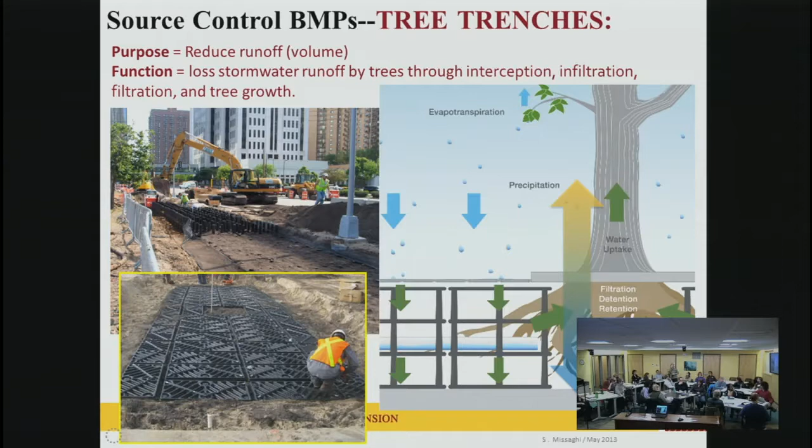Infiltration - this is another source control. So I've done everything, but I can't do a rain garden, I don't have anything, and I only have 1,000 square feet, or well, this is more than that, but let's say I need that flat area for a parking lot. So what do I do? Maybe I can store the water underneath the parking lot - maybe I can put pipes where I can store the water temporarily, promoting the water to infiltrate. On top of that, I can put a parking lot, so I can use the whole area. That's another example.

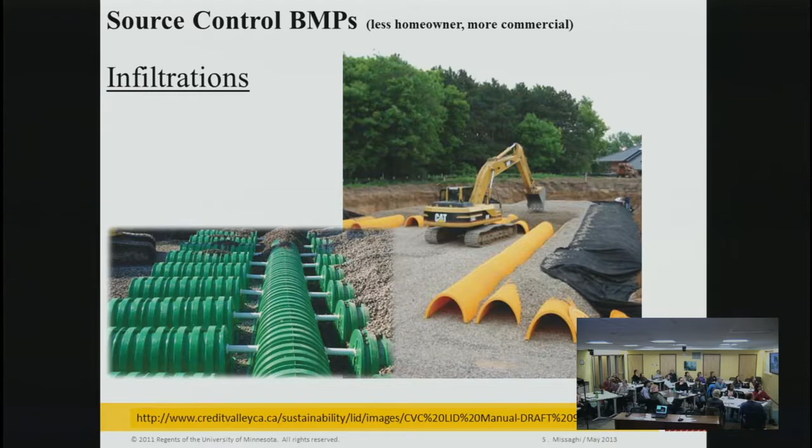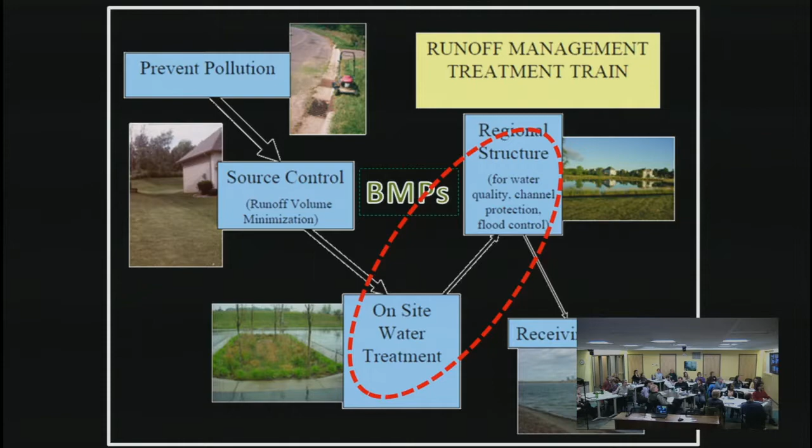So this was the source control - now we've minimized as much as we could, and now we have to allow some runoff to go downstream. Now I have to treat that water before it can go downstream. Everything we've talked about so far, we actually did treat the water too, because by minimizing it, by reducing it, you don't have to deal with the dirty water downstream, you don't have to spend money cleaning that water. So all the prevention, all the source control, is also a treatment BMP as well.

Water quality, when we talked about it, what are these ponds? In the new developments since the 1980s, you see them all. Basically, the law says you can't let your water go downstream if it's not as good as when it came on your site. So in order to do that, I dig up this hole or a pond.

I hold the water. The water comes with all the sediment, all the nasty stuff in it. I hold the water, allow those sediments to settle to the bottom, and then I let the water go at a specific rate so I can control how fast the water goes downstream, and it is also cleaner than when it came into the site.

Of course, what do I do after 10 years? I have to dredge, I have to clean that, right? And what I do with it is a whole different discussion. We'll have a whole class on that one.

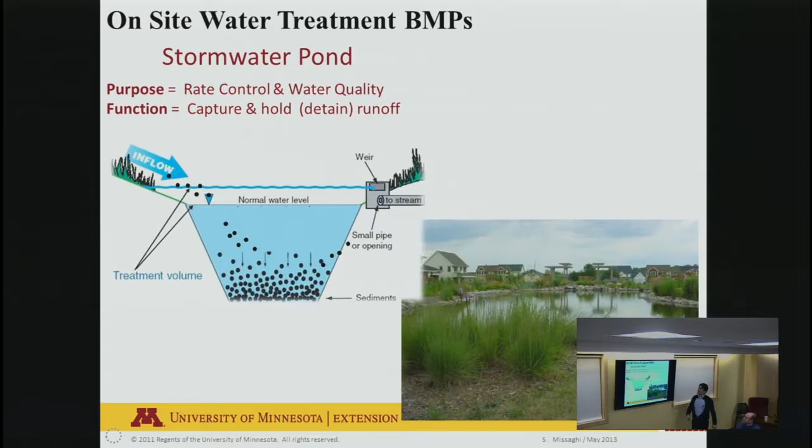So, what can I do as a homeowner about the water quality pond? Be aware of what they are and be picky of what you accept.

This is the Hennepin County Library in the city of Plymouth. It's the same scenario, they still have to use a retaining wall, but guess what? This is a city park next door, and people are right there, and people walk by it all the time, and they enjoy it. And most of all, it also brings back some of the function of the ecosystem, because you have flowers. I heard talking about bees and insects and everything else.

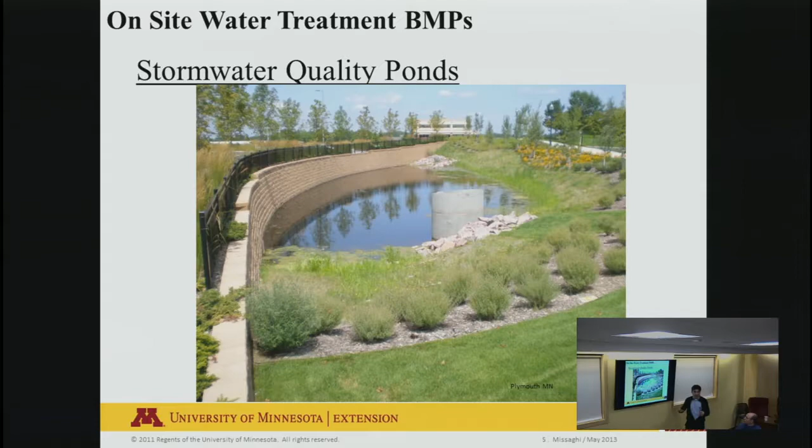So again, as a homeowner, yes, I cannot go out there and construct a water quality pond, but I can know about it and I can request one that's functional. But I do inherit a lot of the problems with the water quality ponds.

If you have them, I didn't see that many hands, but usually the problem you have is that you got to remember, we constructed these ponds to trap trash. That's what they're for. So if you see trash in it, it's because they're doing their job.

Not everybody is open to that. If you spend lots of money, buy your house next to a water quality pond, you expect it to be in the condition that a salesperson told you that it'll be there forever. But that doesn't work. If it's doing all these things, that means it's doing its job, right? It's a good filter, it's trapping everything.

But the issue is that we have algae, we have trash, plants, and so forth. These are some of the issues. And of course, the algae is the biggest problem, or the duckweed on these ponds. Again, they trap in the nutrient, and you have the sunlight, you have the water, of course the plants are going to grow. So they're very productive, and they can be maintained and cleaned on a regular basis.

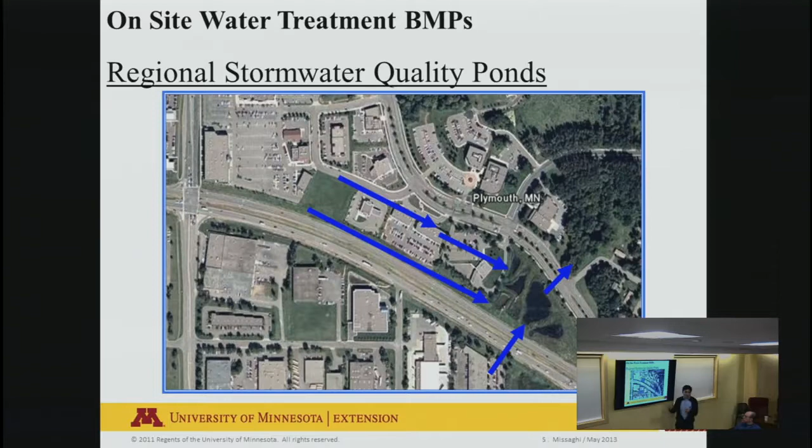And sometimes we go into larger ponds, and they treat a whole neighborhood, and they're called the regional ponds. And again, as a homeowner, we don't do that often, but you may enjoy seeing some of these.

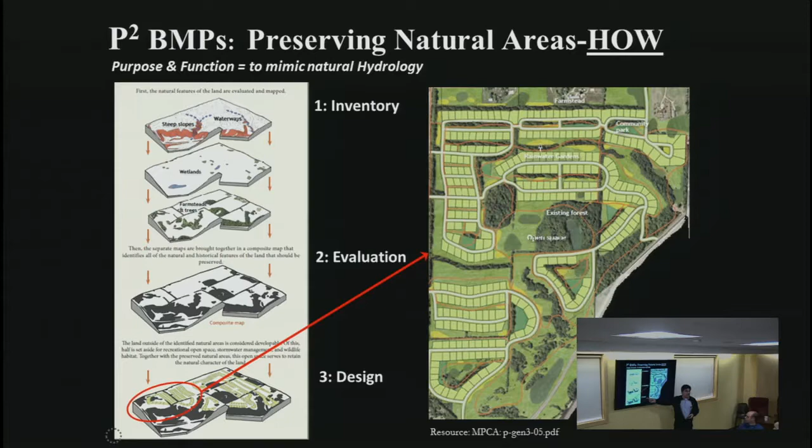So the first thing you do is go to the site and do inventory. Let's go through it - what do I have on site? Do I have trees? Do I have springs? Do I have creeks? What do I have on site? Evaluate - can I keep everything? Some things maybe have got to go, but can I at least keep track of what functions I'm removing, so that I know? And then I can design accordingly, using the function that exists and replacing the functions I've lost.

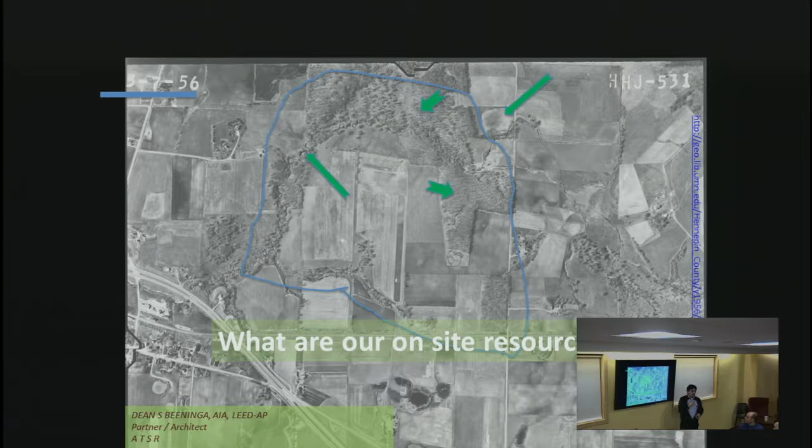So what did they do here? They started with the site. The first thing they did is an inventory: we have trees, and it seems we have a nice creek here. We don't want to mess with the creek, we want to keep the creek. So we have the trees, we have the creek, and the arrow shows the degree of the slope and which way the water flows. Because I want to keep the natural hydrology, I better know how the water flows on site. So I keep all that information.

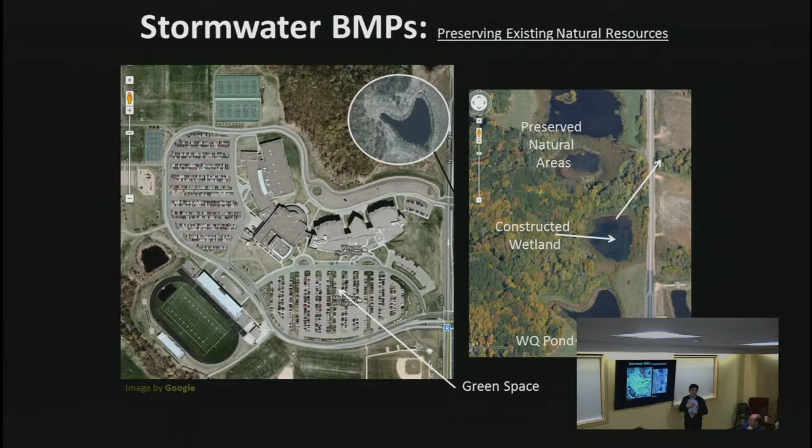I cannot build a high school, but certainly I live in a city that may build a high school, and I have a system where I can participate in that decision making.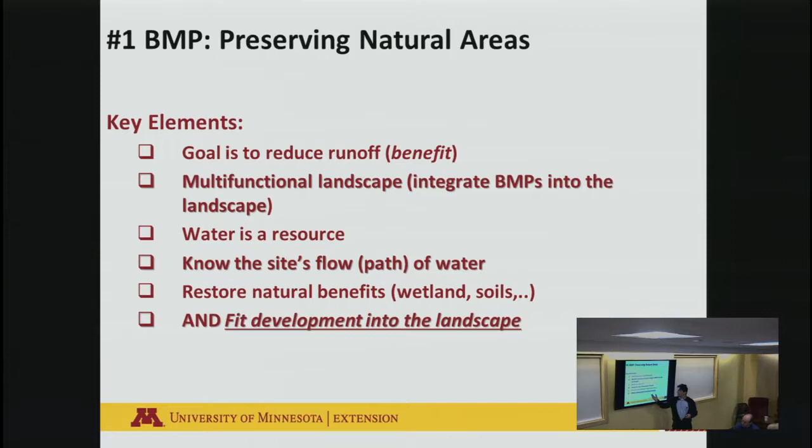So what are the features of preserving natural areas? First, it reduces impervious cover. If I don't have to pave, if I reduce pavement, it's an improvement. I can use the pervious area for more than one thing—not only is it green space, it can be used for stormwater. Remember, the goal is always to reduce runoff. Preserving the natural area is one of the most effective ways. We have to learn to fit development into the landscape, into what we have, and not always change the landscape for the development.

So we're going to design like nature. This is a review for you.

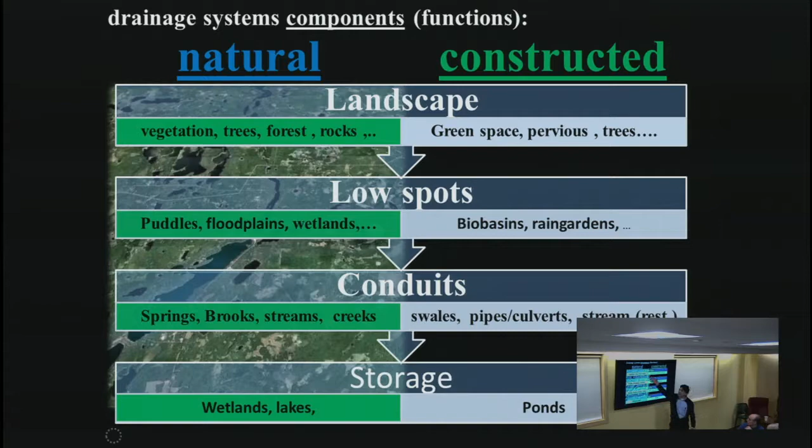Just remembering as we talk, so where would I put the BMPs on the slides? Where would the BMPs go? When I talk about tools, I'm talking about green space, rain gardens. These are my tools, right? These are the tools that help bring back some of the function of the natural landscape. We have lots of tools, lots of different things we can use.

Main message: we have what to do the job. We have tools, we have solutions. It's not easy, but we have the ways to correct the process, to do it. So, very quick review of what we've talked about so far.

Why do we care? For a moment I got worried—no one said why do we care. Finite amount of water, finite amount of water, and we want clean water. Who is against clean water, you know? So we care because we want clean water.

What is the problem? Three problems. If the property is developed, that creates excessive runoff, which creates three main problems for us. You can't leave tonight unless you know those three problems. Why is that so important for me to know? Because if I want to implement a solution on my home site, it has to address one of those three problems.

So we have too much water that moves too fast and degrades water quality. To solve the problem, what approach do I use? Mimic natural hydrology. All right—wait a minute, I can read this, you guys, come on. But mimicking natural hydrology alone doesn't do it, right?

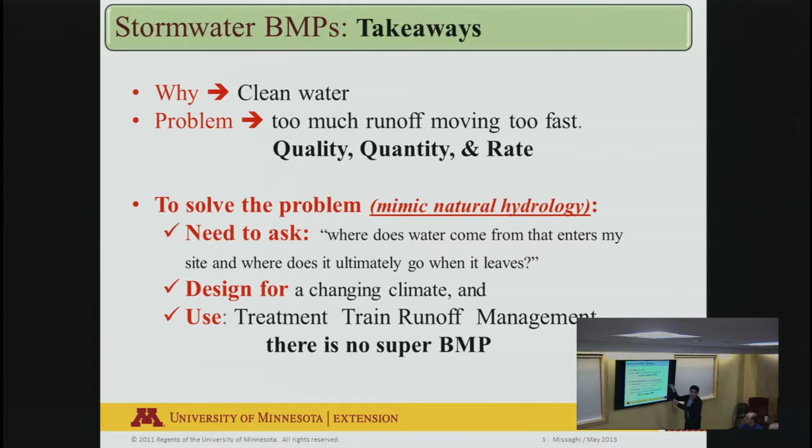And the way we categorize our best management practices—remember that chart I showed you with arrows? That is a treatment train, right? We focus on the function of the BMPs. All right, so believe it or not, I think we're almost getting close to chapter 4.

Okay, so in chapter 3 we talked about solutions. We introduced lots of solutions. Now the idea is that we're going to focus on the function of the BMPs. We're always more interested in the function. Sometimes it's easy to get caught up in the technology and how nifty they are, but we always want to ask: does it solve the problem? Does it address the issue? And we have to remember, no one BMP can do everything.

If I'm a mechanic, do I deal with only one tool in my workshop? No. In my shop I have everything. I've got to have lots of tools. It's going to require lots of tools to solve the problems. There are no silver bullets. I love this saying: if all you have is a hammer, everything looks like a nail. That's exactly the same with stormwater. If you thought a rain garden was the only thing that could solve the problem, that's not really realistic.

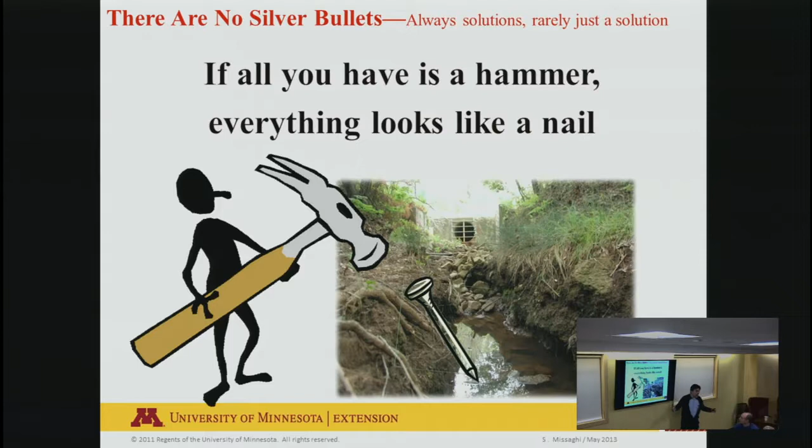Okay, so that was our review. Again, what are we looking at here? I'm sorry, does it bother you that I keep asking the question?

Okay, may I ask a quick question? I know we have a few minutes. We can do an exercise, or I can go through some of the pictures of BMPs. What would you like to do? Would you like to see the pictures of BMPs?

Okay, stop me - but I didn't tell you, this is worse the other way around. I'll show the picture, you tell me what we're looking at. So feel free to tell me, what are we looking at?

Rain garden, somebody said rain garden. Yes, it's a very sandy rain garden. The person who designed it knows the plants that will last there and be functional. It's early in the season, so it doesn't look totally there, but it is functioning. So it's a BMP. Where would you put this BMP? Would you say it is pollution prevention, source reduction, or treatment? Treatment and source reduction - you're right.

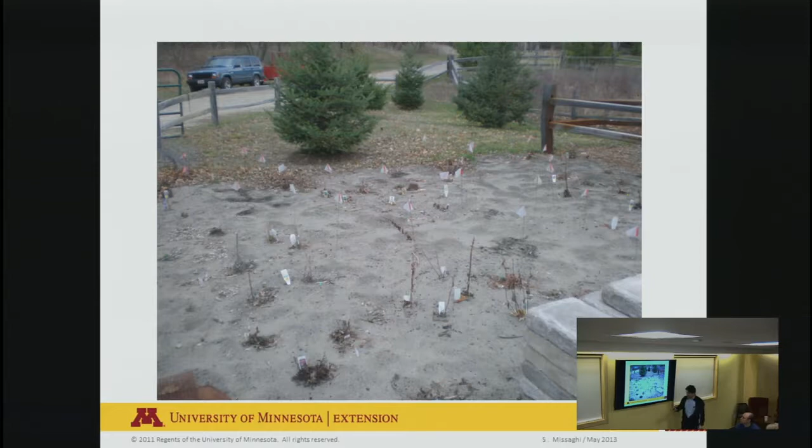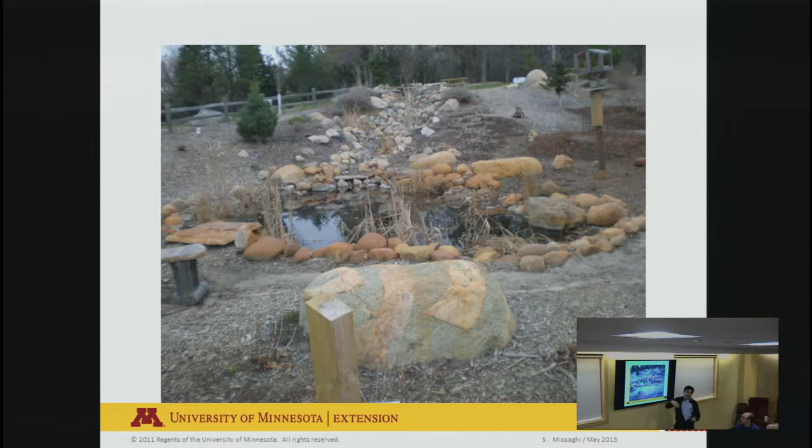Yeah, good. All right, ready? What are we looking at here? Exactly, stormwater pond. Don't you love the idea? They did this - why not make it aesthetic? Why not bring art to it? There's no reason they cannot look nice. So they have this waterfall. I was sitting there, and the sound of it - it is cheating. They actually have a pump. They run the water through it. But why not? I mean, okay.

This came up - what did we decide to call this? Trough? Pre-treatment before the rain garden. Somebody thought, well, why don't I make it the same size as the shovel? So when I go to maintain it, I just put the shovel in and walk, and boom, it's done. It works, it requires the maintenance, but they put it before the rain garden, and this one is a smaller, homeowner-size site, and it captures all the treatment.

We used to be in love with rocks. We're learning rocks get a little complicated to clean for pre-treatment. It's not as easy. What are we looking at here? Exactly. What is it doing? Slowing the water. My gosh, they are great.

All right, what's happening here? Reseeding. Hydroseeding. So what do you do? Well, I've learned if I mix the seed with a bunch of stuff that can keep it on the ground, it also provides the nutrients, it will keep the moisture in the ground, and the seeds will grow. So germination rates increase tremendously, and the survival rate increases tremendously. So all of a sudden I have this bare ground - I have a choice: let it be bare and the rain comes and washes everything out, or I can do a hydroseed to protect it and allow the vegetation to grow much faster.

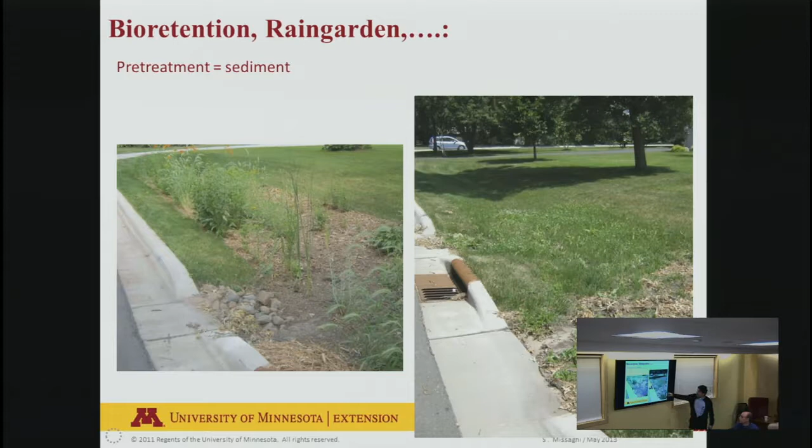What are we looking at here? The rain garden, the parking lot up there. It's a retrofit. Afterwards they said, no, why do we have all this asphalt? They went back, cut the parking lot, and turned it into a rain garden.

I'm not going to ask what we're looking at, you can help me out. What's the purpose of the rocks here? Pre-treatment, slowing it down before it goes in there so it doesn't wash all the time.

And what are we looking at here? They said, no, the rocks are really hard to clean. As a homeowner, you can learn this - rocks look nice, but they're hard to clean. What can I do? Oh, it's just grass. I can use grass as a pre-treatment before it goes into my rain garden. Easy to replace - every 5 years if you have to replace it, the rest of it you just mow down.

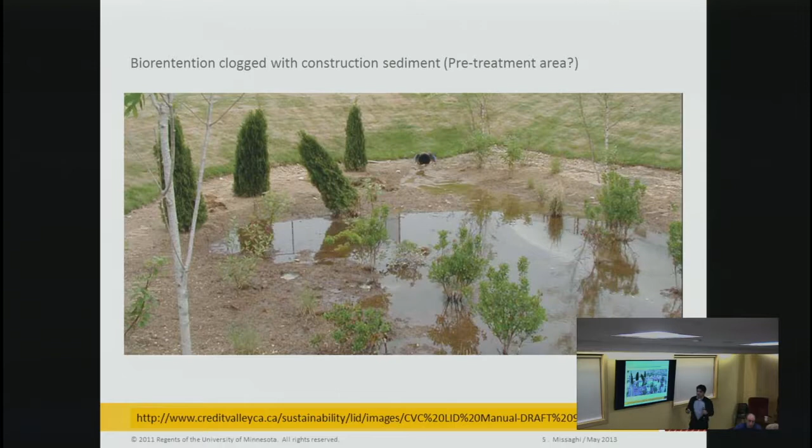Very good point, these are facilities, these are equipment, each one is different. At the beginning, we used to say after 5 to 10 years you have to go replace all the soils because it's going to get plugged. Now we're learning the plants are doing a very good job in some rain gardens where the infiltration rate is actually increasing, so it really depends. If you maintain it, but eventually you may get to a point where you have to go in there, cut it, take everything out, replace the soils, and start over, which is perfectly fine. It's a treatment facility.

And here they're using a mat for pre-treatment because it's important. If I keep talking about pre-treatment, we haven't explained it. If you have a rain garden, you want to protect all the investment. You want to pre-treat it, capture the sediment before it goes into your rain garden. So that's why you have all these steps.

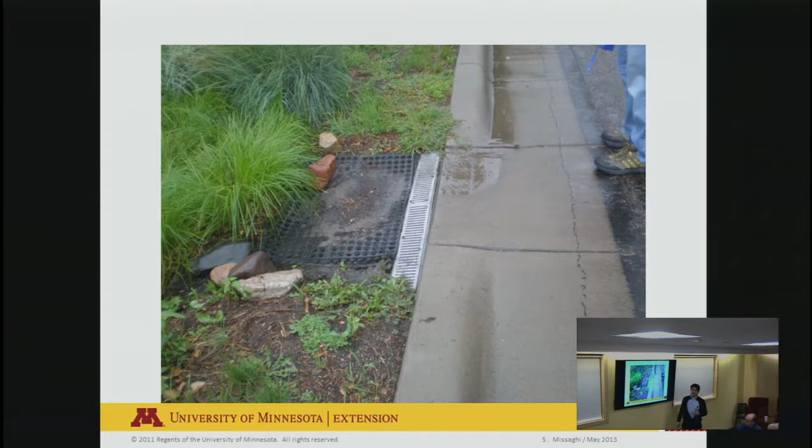And why doesn't Minneapolis let us do that? Minneapolis doesn't let you do that? They don't put in residential curb cuts or rain gardens as far as I can tell. There's one at our house. There's one there on the border of St. Louis Park.

Just a reminder that BMPs, we use green infrastructure again to restore natural hydrology. I apologize, I ran over time. Watershed approach, you know this already, right?

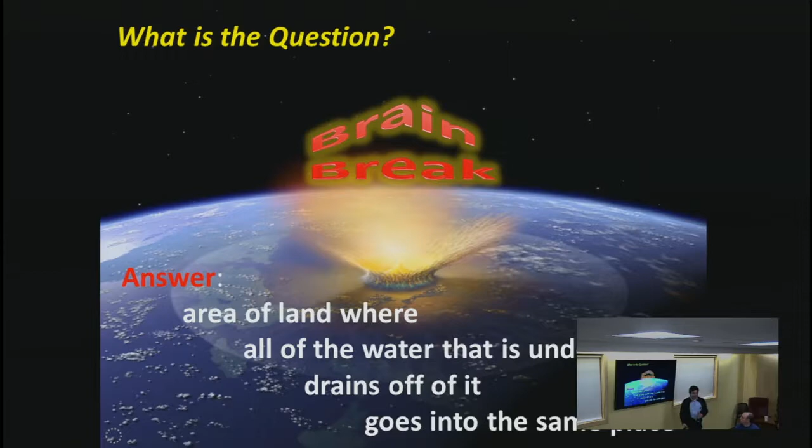The last question of the night, I think. We're gonna, so, wow, you guys joined that. That's why I feel comfortable skipping what we're gonna talk about, because that way we're just going to show you the watershed, what the watershed is. Just very quickly, I was just going to show, this is the state of Minnesota.

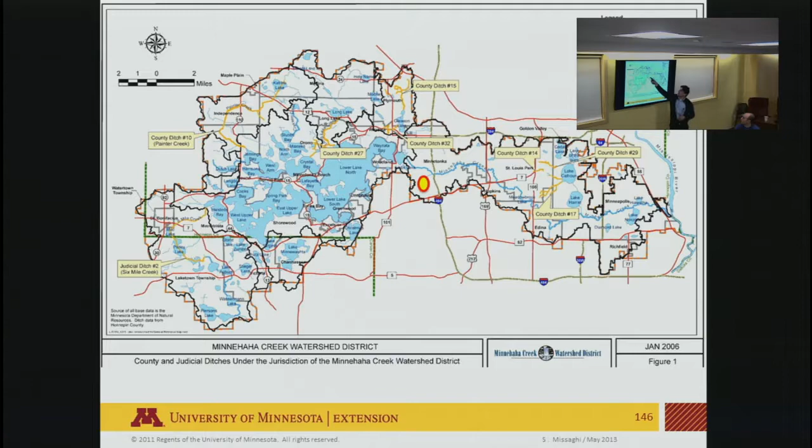I was going to show you where we are tonight. This is the Minneapolis watershed, this is the Minnetonka watershed, and this is where we are tonight. It's interesting that we're only just a little bit from Minnehaha Creek and Lake Minnetonka. The takeaway is that yes, stormwater is a large-scale issue, but in reality stormwater runoff is a watershed-scale problem that can be managed at small scale, where the rain falls just like your home. So when you do something at home, the idea is it's always closer to your watershed than you think. It's all connected. It's a large scale problem, but it gets taken care of at the small scale, right at the home site.

And this was going to be an assignment, I'm sorry we didn't get to do it, I'm sure you're totally disappointed. But the idea is you could do this at home: go home and try to draw your home site, figure out and draw everything, do a map of your property parcel, and show where water comes on your property and where it leaves your property. That's a really good assignment to do, a really good thing to know about your property, just to understand on a very small scale how the hydrology of your site works.

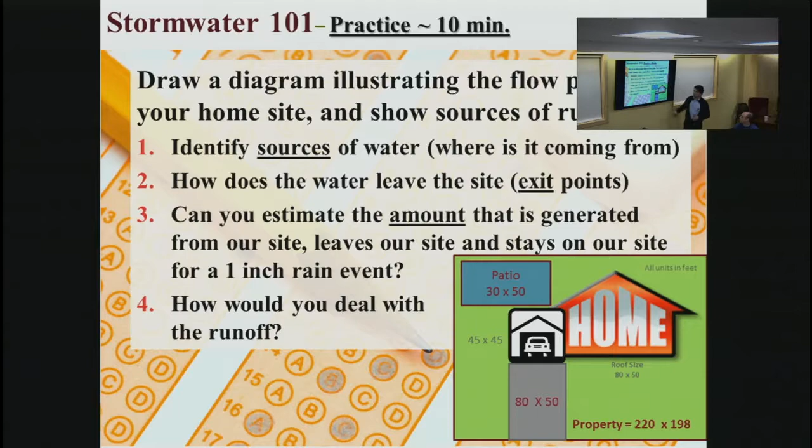Yeah, and once you did that, you'll be amazed. You can guesstimate based on the size how much water you're going to get after an inch of water, right? One inch over one acre is 27,000 gallons, so you can do the math. There are tons of websites that will help you do the math. Actually there's no math in this one, this one's just drawing. And we're done.